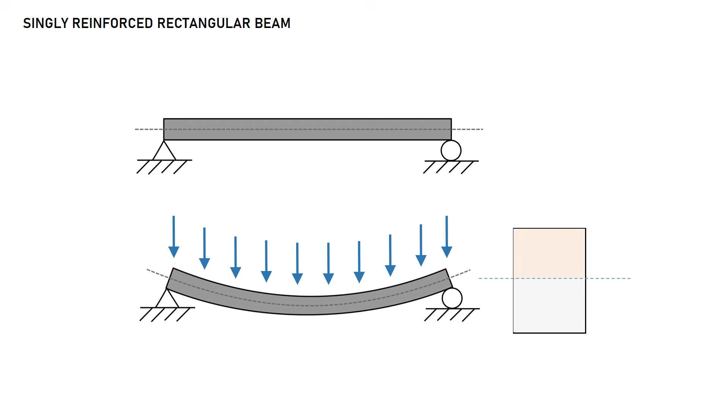Singly reinforced rectangular beams. As we already know, beam is a structural element that primarily resists loads applied laterally to the beam axis, and its mode of deflection is primarily by bending. At kapag nag-bend yung beam natin, mahati siya into compression and tension. Take note, hindi palaging tension ang lower side at compression ang upper side. Nakadepende yan sa type ng beam at loading condition.

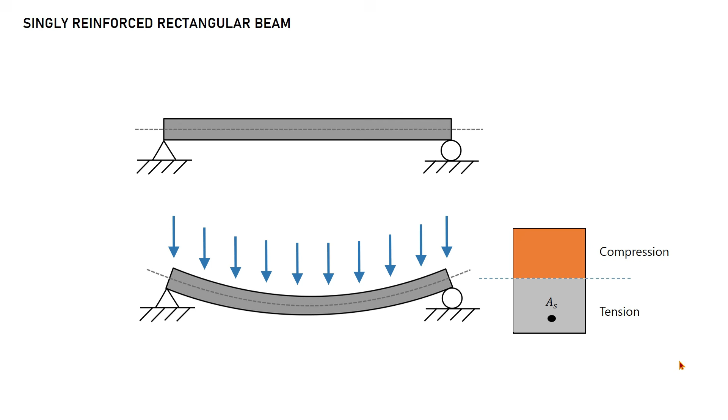Since concrete is weak in resisting tensile stress and this side of the beam is under tension, this part of the beam is no longer effective in resisting tensile strength. Thus, in analysis, it is assumed that the tensile strength of concrete is neglected in axial and flexural calculations. Kaya tayo naglalagay ng steel bars or reinforcing bars at the tension side of the beam to reinforce our beam to carry the applied loads.

When we cut the section of the beam, ito yung ating makikita. Ito yung 3D and this is the side view. This parabolic stress distribution is the actual compression stress variation of concrete. The maximum width of the parabola is equal to f'c, or f'c is equal to the compressive strength of concrete. The code allows the use of a rectangular compressive stress distribution block. It is also called Whitney stress block.

And also, one of the reasons is for simplicity in the determination of the area or volume of the stress block. The code suggests that the width of the equivalent stress block is equal to 0.85 f'c. Ang sabi ni Whitney, yung magiging centroid daw ng equivalent na concentrated load nitong parabola is coincide sa magiging centroid nitong equivalent rectangular stress block.

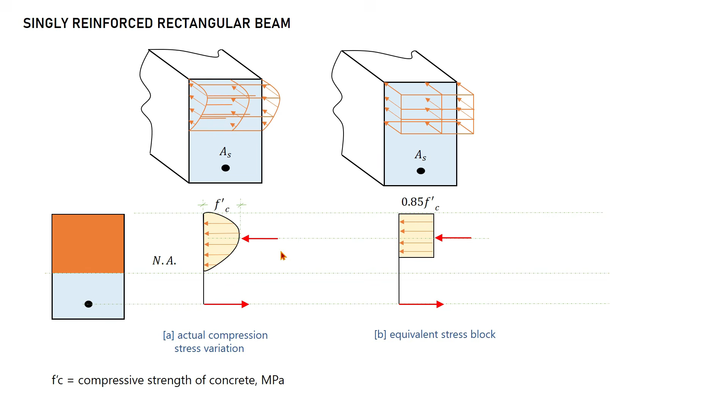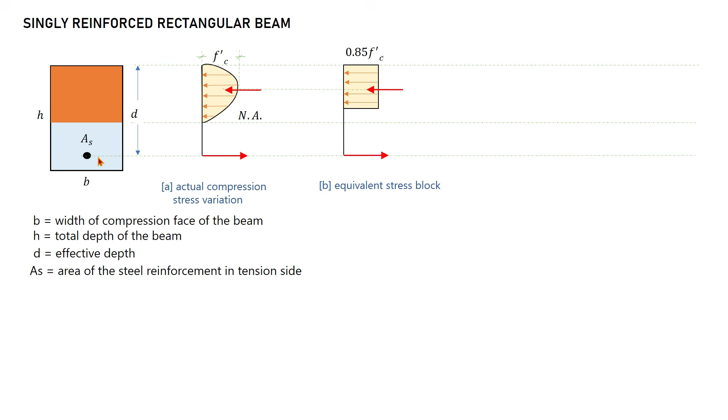Let's start with the common terminologies on this topic. b is the width of the compression face of the beam. h is the total depth of the beam. d is the effective depth of the beam measured from the extreme compression fiber to the centroid of the tension reinforcement. As is the area of the steel reinforcement in tension side. Rho is the ratio of the steel reinforcement given by the formula As over bd.

c is the actual depth of the compression concrete. c is measured from the outermost extreme compression fiber to the neutral axis. And a is the depth of the equivalent rectangular stress block, given by the formula a is equal to beta 1 c. The values of beta 1 varies with the value of f'c. As we already defined, f'c is the compressive strength of concrete.

When the value of f'c is greater than or equal to 17 but less than or equal to 28, the value of beta 1 is 0.85. But when f'c is greater than 28 but less than 55, beta 1 is given by this formula: 0.85 minus 0.05 over 7 multiplied by f'c minus 28. And when the value of f'c is greater than or equal to 55, the value of beta 1 is 0.65.

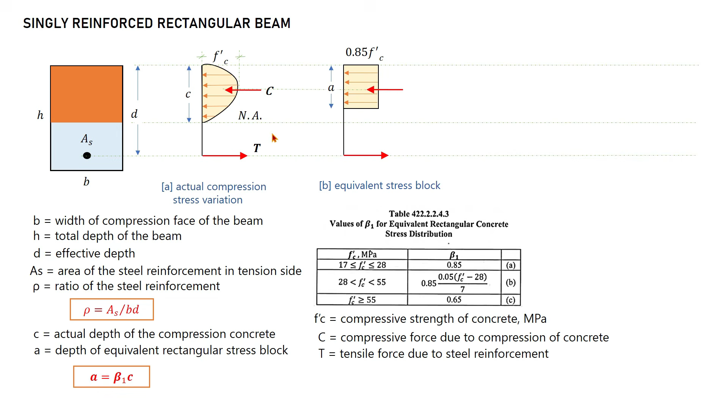C is the compressive force due to compression of concrete, or this is the equivalent concentrated load of this parabola. And T is the tensile force due to steel reinforcement. Since yung diagram ng equivalent stress block na yung gagamitin natin sa analysis, C is equal to 0.85 f'c ab, or equal siya sa volume nitong rectangular stress block. 0.85 f'c is the width of the stress of concrete multiplied dun sa face nung concrete section ab. Kaya naging 0.85 f'c ab.

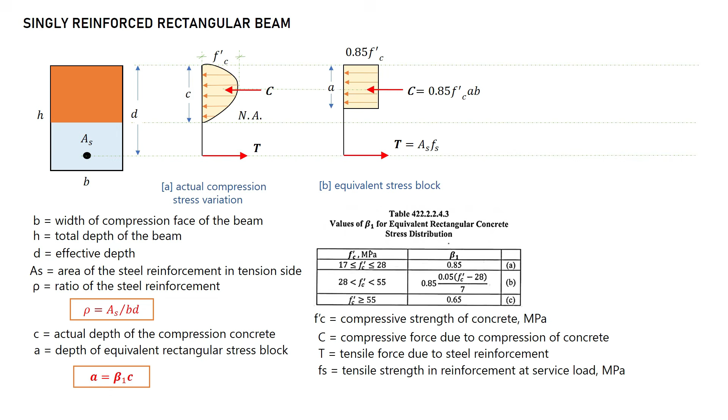And T, the tensile force, galing lang siya sa formula na stress is equal to force over area. The formula of T is equal to As fs. fs is the tensile stress in reinforcement at service load. I-drawing naman natin yung strain diagram. Epsilon c given by the value 0.003. Epsilon c is the strain in concrete. The code suggests that the maximum strain at the extreme concrete compression fiber shall be assumed equal to 0.003.

Epsilon s is the strain in steel, given by the formula fs over Es. Nanggaling lang siya sa formula na modulus of elasticity is equal to stress over strain. One of the parameters na palagi natin ma-encounter is yung fy or yield strength of reinforcement. And last, Es, modulus of elasticity of reinforcement with a constant value of 200,000 megapascal for steel.

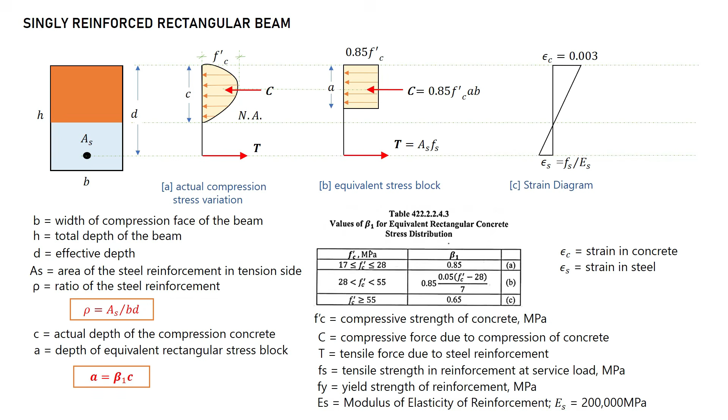In analyzing our beam, one of the important values that we need to obtain is the moment capacity of our beam, given by the formula Mu is equal to reduction factor times Mn. Isa-isahin natin. Mu is the ultimate moment capacity. From the word itself, ultimate. So, siya na yung maximum moment na pwedeng i-carry ng ating beam. Mn is the theoretical or nominal resisting moment. And next is phi or reduction factor. I-discuss natin mamaya yung reduction factor. From figure B, ma-obtain natin yung equation ng Mn equal to C or T multiplied by d minus a over 2.

Looking at the diagram of the equivalent stress block, ang mga nag-a-act lang na forces ay yung C and T, or yung compressive force due to concrete and yung tensile force due to steel. Therefore, may maproproduce tayo na couple moment. So, by taking moment either on the axis of C or T, ang mapoproduce natin na equation ng Mn is this one. Assuming that the value of Fs is equal to Fy, or its yield strength capacity, and taking the equation of equilibrium, summation of all forces horizontal is equal to 0.

Since ang nag-a-act lang na forces ay dalawa, C is equal to T. C is equal to 0.85 f'c a b, and T is equal to As fs. Since inassume natin na fs is equal to fy, therefore As fy. Since the formula of As is equal to rho b d and arranging the equation, therefore, ang ma-obtain natin na equation for a is equal to rho d fy over 0.85 f'c.

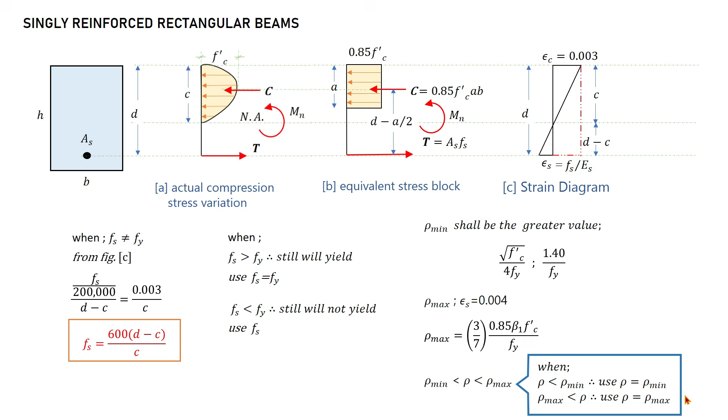Our actual value of rho should fall between rho minimum and rho maximum as prescribed by the code. When the value of rho is less than rho minimum, we will use rho equal to rho minimum. But when the value of rho exceeded the value of rho maximum, therefore, we will use rho equal to rho maximum.

Let's talk about strength reduction factor. It is used to reduce the calculated strength of a structural member to account for uncertainties arising from the material used, inaccuracies of placing steel, inaccurate dimensions of a structural member, inaccurate design calculation, and any other factor.

In the NSCP 2001, the strength reduction factor for flexural member is constant, that is 0.9. But in the NSCP 2010 or 2015, the determination of reduction factor was subdivided into three classifications: compression controlled, transition, and tension controlled.

Epsilon t is the actual strain of your steel bars and epsilon ty is the equivalent strain of your yield strength. So it falls under compression controlled if epsilon t is less than or equal to epsilon ty, transition region if epsilon ty is less than epsilon t and less than 0.005, and tension controlled if epsilon t is greater than or equal to 0.005. As we already know, epsilon ty is equal to fy over Es.

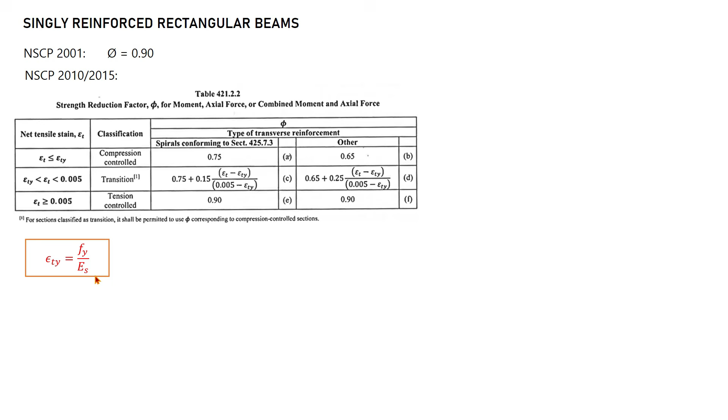This table, pwede natin siya i-convert in terms of stress. So, if fs is less than or equal to fy, reduction factor is equal to 0.65. If fy is less than fs but less than 1,000, reduction factor is equal to 0.65 plus 0.25 multiplied by fs minus fy over 1,000 minus fy. And if fs is greater than 1,000, reduction factor is equal to 0.90.

Nanggaling yung 1,000 if the epsilon value is 0.005 multiplied by 200,000. And yung column na to yung gagamitin natin since this column is for spirals.

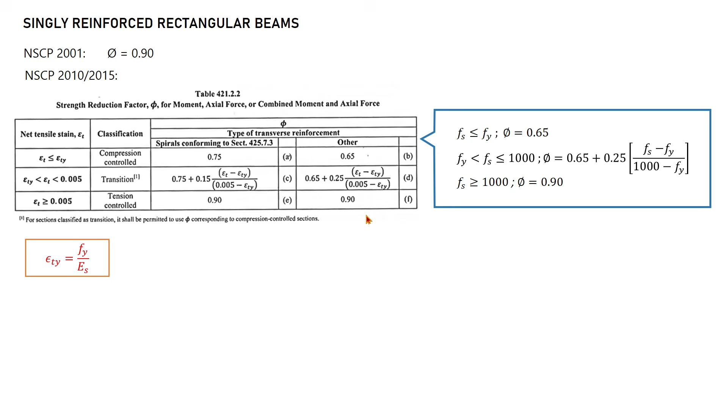So, nandun tayo sa other. Dahil for beam ay hindi naman spiral reinforcement yung gagamitin natin. Compression control section: the strain at extreme fiber for concrete reached 0.003 before steel yield. In this case, the section is over-reinforced. In the compression control section, mas mauunang ma-reach ni concrete yung kanyang maximum capacity prescribed by the code bago si steel. Mas mauunang bumigay si concrete bago si steel, kaya siya naging over-reinforced.

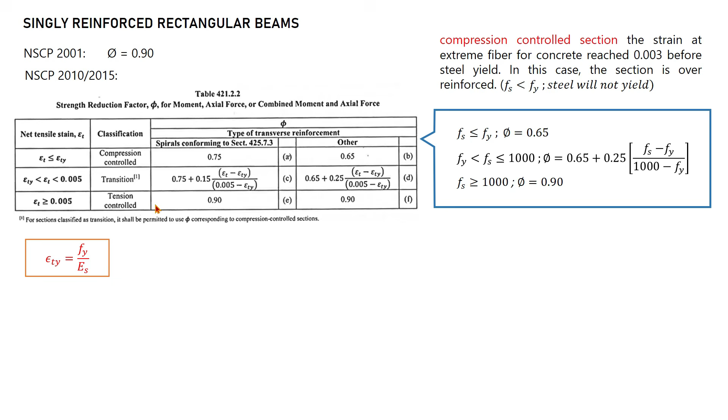Laktawan natin muna yung transition region. Punta tayo sa tension-controlled members. In tension-controlled members, reinforcing steel yields before the concrete strain at extreme compression fiber reaches 0.003. It means in tension-controlled members, yung actual steel strength ng reinforcing bars natin is na-reach niya or na-exceed yung kanyang yield strength capacity. On that case, the steel will yield.

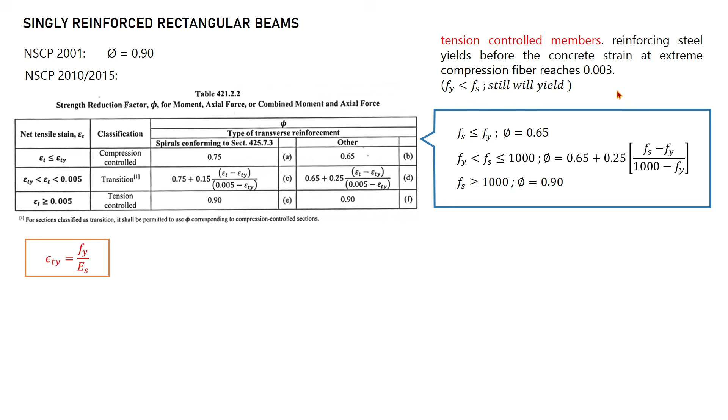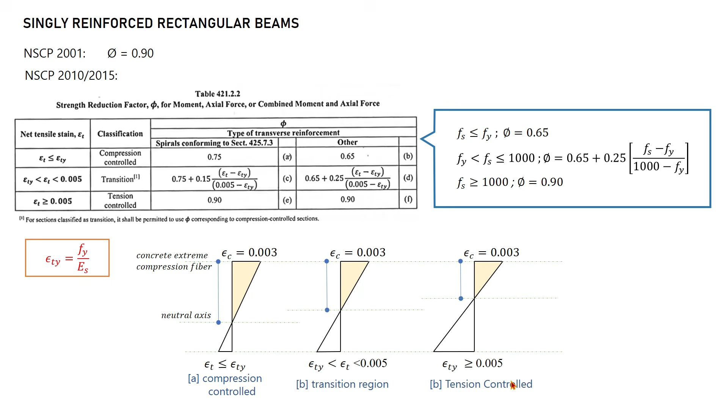Let me show you the diagram for compression controlled, transition region, and tension controlled. Since the maximum strain for concrete prescribed by the code is 0.003, so constant na yung value na to, hindi na siya magbabago. Ang nagbabago na lang is yung strain ng steel. Kanina, pinakita ko yung value ng rho max, i-derive naman natin siya ngayon.

From figure C, using similar triangle, since yung limiting strain natin for steel is 0.004, eto yun, and this length is 0.003, equal siya sa strain ng concrete, kaya siya naging 0.007. So, 0.003 is to c, and 0.007 is to d. Arranging, c max is equal to 3/7 d. From figure B, summation of all horizontal forces acting on the beam is equal to 0. C is equal to T.

0.85 f'c a b is equal to As fy, where As is equal to rho b d and a is equal to beta1 c. But we already have the value for c max equal to 3/7 d. So, isa-substitute na natin siya dito. Then, sa equation natin na ito, isa-substitute natin yung value ng As and a. 0.85 f'c, a is equal to beta1 multiplied by 3/7 d times b, equal to As equal to rho b d multiplied by fy. Therefore, rho is equal to 3/7 multiplied by 0.85 f'c beta1 over fy.

I-derive naman natin yung value ng nominal moment at strain of steel equal to 0.004. Mn is equal to C multiplied by (d minus a/2). Mn is equal to 0.85 f'c a b multiplied by (d minus a/2), where a is 3/7 beta1 d. Therefore, substituting the value of a, 0.85 f'c, a is equal to 3/7 beta1 d, multiplied by b multiplied by (d minus, substitute ulit, 3/7 beta1 d over 2). Simplifying, Mn is equal to 51/140 beta1 f'c b d squared multiplied by (1 minus 3/14 beta1).

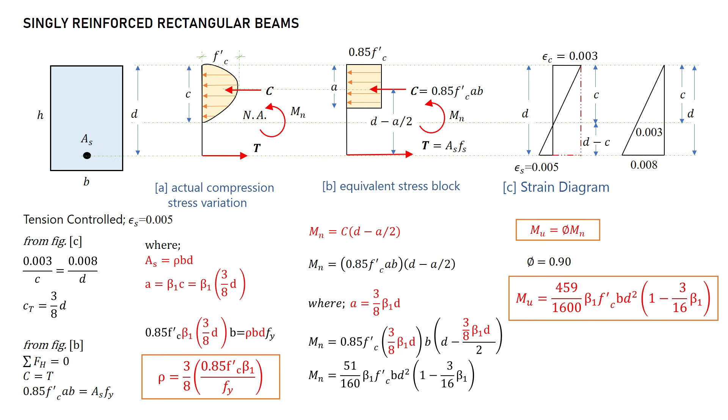Using the formula, Mu is equal to reduction factor times Mn. Since our beam is under tension controlled, therefore our reduction factor is equal to 0.90. Then our final formula for Mu or ultimate moment capacity of the beam is equal to 459/1,600 beta1 f'c b d squared multiplied by (1 minus 3/16 beta1).